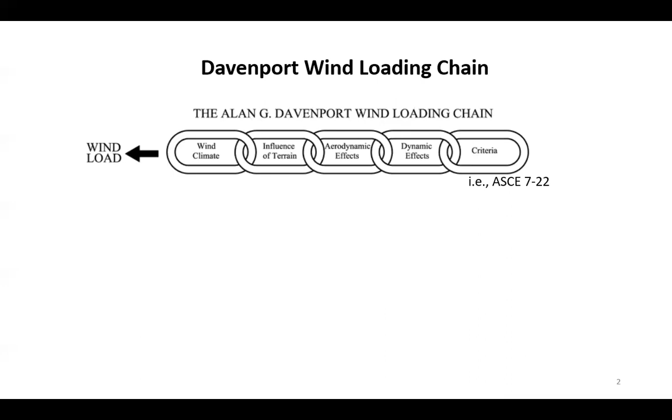The first and second components are marked in red here. V here is the wind velocity, and all the parameters indicate the influence of terrain. The third one is the aerodynamic effects, CP, which is the pressure coefficient. And the parameter representing the dynamic effect is termed G, the gust effect factor.

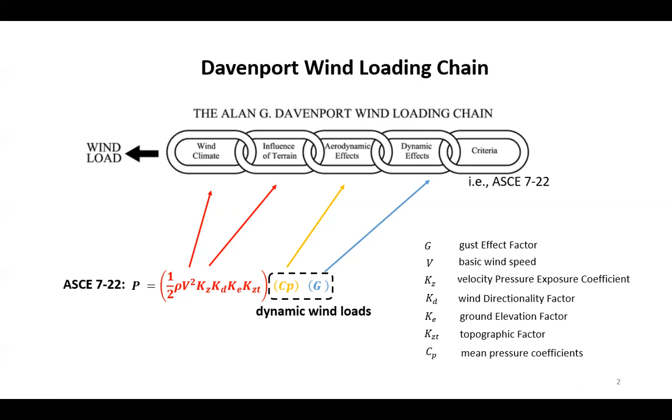That means the combination of CP and G together determine the dynamic wind loads, or the peak wind loads, on structures and buildings. This framework is actually based on quasi-steady theory, which I will discuss in detail in the following sections. In this presentation, I will talk about the pressure coefficient and the gust effect factor, which is very important for the determination of wind loads on structures.

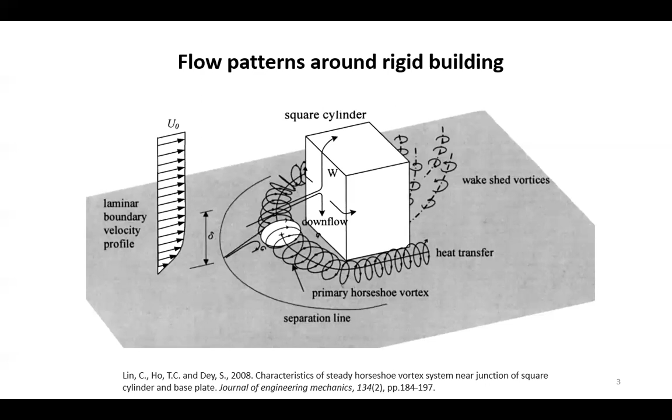In wind engineering, the greatest challenge is determining the fluid mechanism around buildings with different shapes. For example, for a very flat building, such as a low-rise building, the flow will mainly go over the top of the building. While for very slender buildings, such as high-rise buildings, the flow will mainly go around the building. These different fluid mechanics indicate that different parameters of the buildings will influence the fluid mechanism.

For the low-rise or very flat building, the roof height is important. While for a very slender or high-rise building, the breadth B, which is the plane dimension across the wind, is important. The question arises: do aerodynamics depend on non-dimensional geometric parameters, such as the height ratio H/L, plan aspect ratio L/B, or another ratio H/B? Note that L and B are parameters of the plan based on wind direction. L is the plan dimension along the wind direction, and B is the plan dimension across the wind direction.

This is quite different from seismic engineering or similar fields. Wind engineering is heavily influenced by the building shape here.

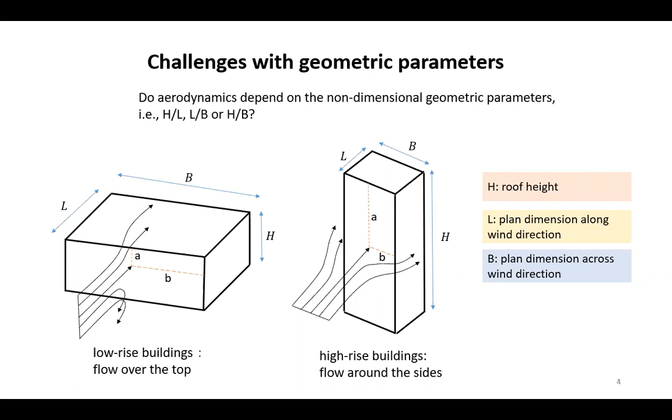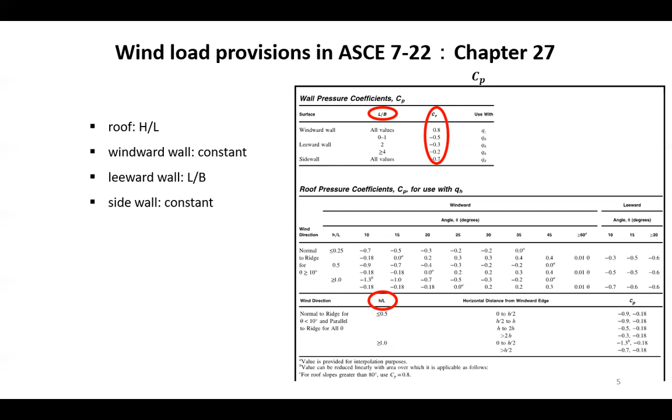In our commonly used load provisions, such as ASCE 7-22, there's a chapter 27 which gives the pressure coefficient based on non-dimensional geometric parameters. For example, for low-rise building uplift, this chapter gives the pressure coefficient as a function of H/L. For wall pressures, like the windward wall (the front wall) and the side wall, chapter 27 only gives a single constant value. But for the leeward wall, the back wall of the building, the pressure coefficient depends on the plan aspect ratio, L/B. But we want to ask: can ASCE 7-22 or the code provisions accurately estimate the wind loads of rigid buildings for any building configuration?

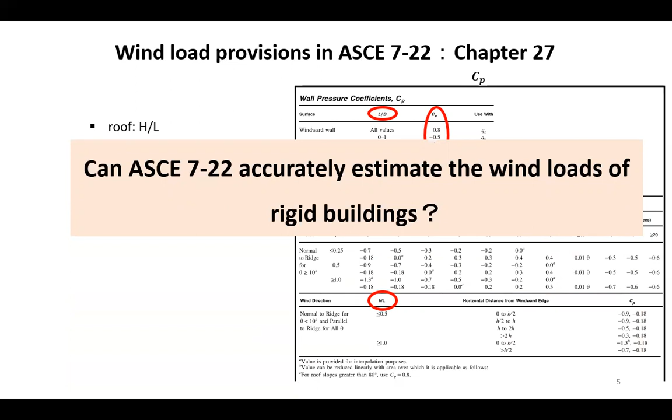As I mentioned in the first slide for the Davenport wind loading chain, the wind loads in many code provisions are developed based on quasi-steady theory. So here I will give a discussion of quasi-steady theory.

Quasi-steady theory assumes that pressure fluctuation is a function of the upstream turbulence, expressed in the equation here. P is the wind pressure, P bar is the mean wind pressure, P prime is the fluctuating wind pressure, and V bar and V prime indicate the mean wind velocity and fluctuating wind velocity respectively. So based on quasi-steady theory, the fluctuation of wind pressure is linearly related to the fluctuation of wind speed. We can use this figure to clearly show the linear relationship between the wind loads and velocity.

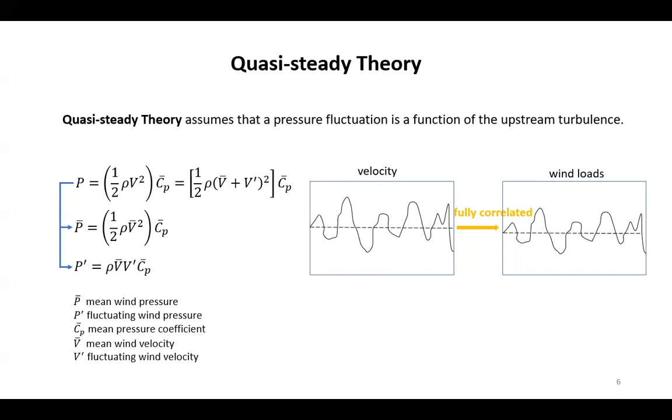Due to this linear relationship between wind loads and velocity in the time domain, we would assume that in the spectrum domain, the wind load spectrum is linearly related to the velocity spectrum. However, we want to ask: does this happen in the real world? No.

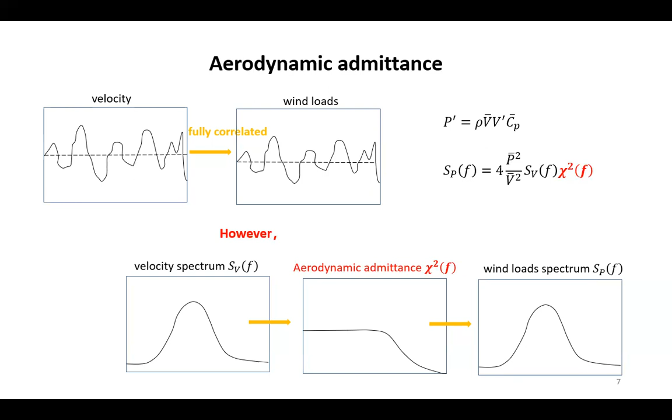Due to the flow distortion around the building or structure, the relationship between the velocity spectrum and wind load spectrum is nonlinear. We give a function named the aerodynamic admittance function to represent this nonlinear relationship between the wind load spectrum and velocity spectrum. Therefore, the spectrum of wind loads is nonlinearly related to the velocity spectrum using this equation.

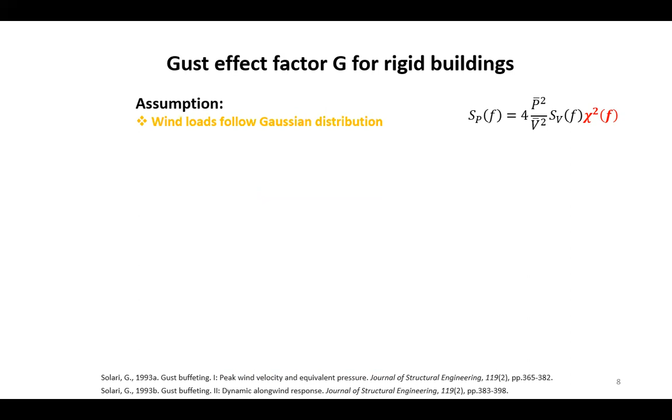Now we develop the Gust effect factor model to account for upstream wind turbulence on dynamic wind loads. This Gust effect factor has two assumptions. The first is that wind loads follow Gaussian distribution, because in a wind field we usually assume the wind flow is Gaussian distributed. The second assumption is that body-generated turbulence is not taken into consideration—only the upstream wind turbulence is accounted for in the Gust effect factor model.

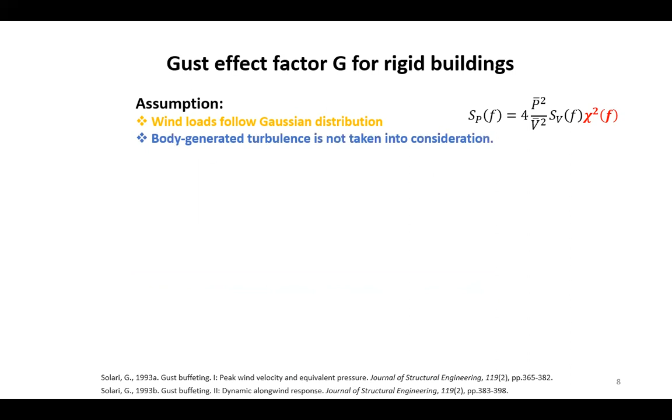Davenport was the first to develop the Gust loading factor to consider the upstream turbulence effect on dynamic wind loads. Later, Professor Solari gave a very beautiful equation for the Gust effect factor model. This model has been widely used in many code provisions such as ASCE, Canadian code NBCC, and European code.

In this equation, two parameters actually influence the accuracy of the Gust effect factor. The first is the peak factor, which reflects whether or not the wind loads follow Gaussian distribution. The second parameter is the aerodynamic admittance function, which relates to the second assumption: whether or not body-generated turbulence affects the dynamic wind loads.

So in order to accurately evaluate the wind loads on structures and buildings, we need to know the aerodynamics of the buildings, like the mean pressure coefficient, very well. In addition, we need to know the Gust effect factor well, meaning we need to know the peak factor and aerodynamic admittance function well.

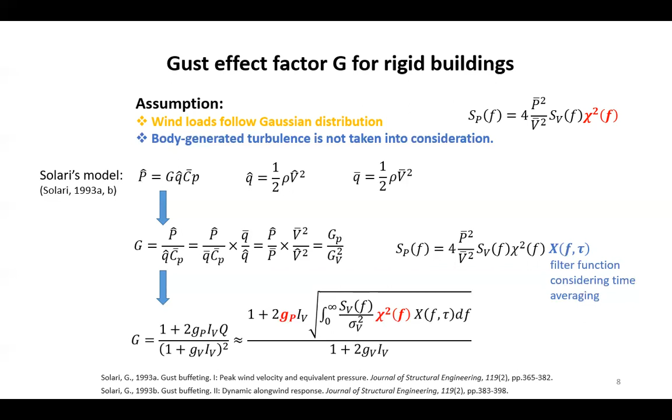In my analysis, I use the original format of the Gust effect factor. In order to evaluate the application of Gust effect factors for any cases, I use this method and compare it with the ASCE model and the constant number.

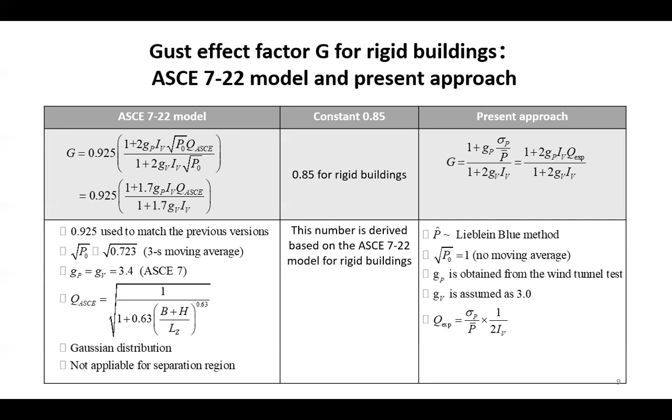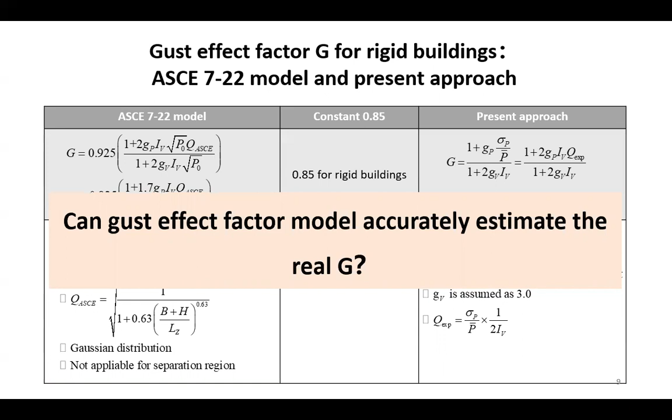So the second objective in this presentation is to evaluate the application of the Gust effect factor model for any building configuration.

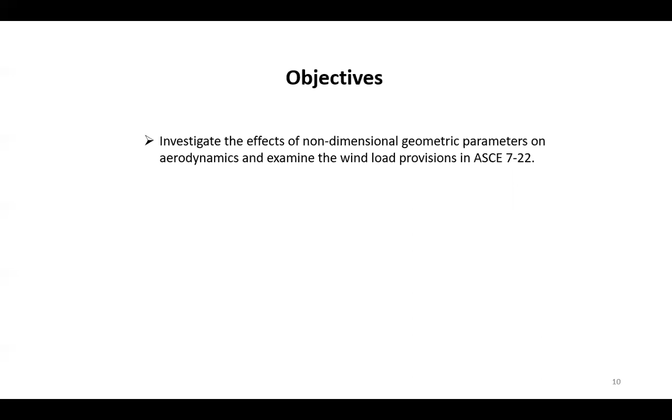I'll give a summary of the objectives in this presentation. I want to complete two objectives. The first is to investigate the effects of non-dimensional geometric parameters on aerodynamic loads, and examine the wind load provisions in ASCE 7-22. The second objective is to study the body-generated turbulence effects on the aerodynamic admittance function and statistical distribution of wind loads, meaning to examine the body-generated turbulence effects on the Gust effect factor.

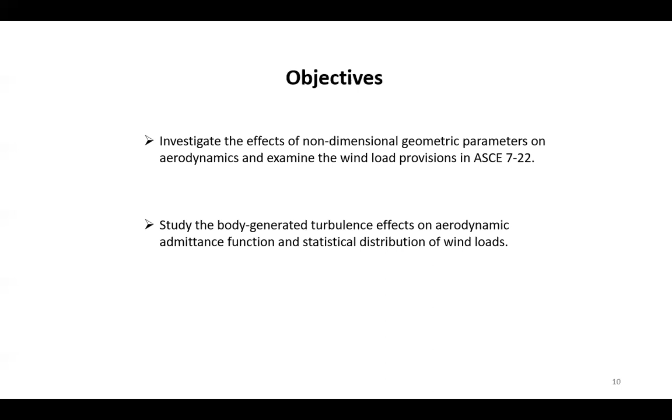Okay, let's look at the aerodynamics. Before I show the results of this analysis, I'll give the terminology used in my analysis. The building shape influences the aerodynamics, influencing the interaction between the structure and the wind field. Therefore, all the dimensions of the building depend on wind direction.

For example, L is the plan dimension along wind direction, and B is the plan dimension across wind direction. But D and W indicate the largest and smallest plan dimension of the building. For case one, where wind comes from this direction, B is the plan dimension across wind direction, so B is W and L is D. For another direction, case two, B is D and L is W. This is quite different, and you should be very clear with this terminology, because all the results I show below are based on it.

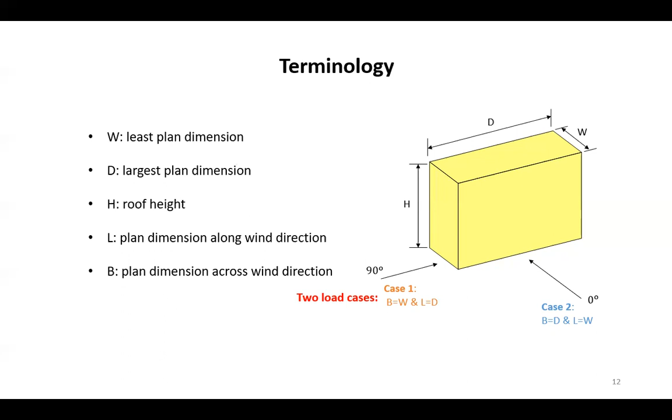In order to systematically study the aerodynamics for any building configurations, we need a very large data set including as many building configurations as possible. The first data set I used is the NIST data set, which includes 36 building configurations, but in my analysis I used 28 configurations with low sloped roofs, meaning the roof slope angle is smaller than 10 degrees. This data set has many building models with different plan dimensions and roof heights.

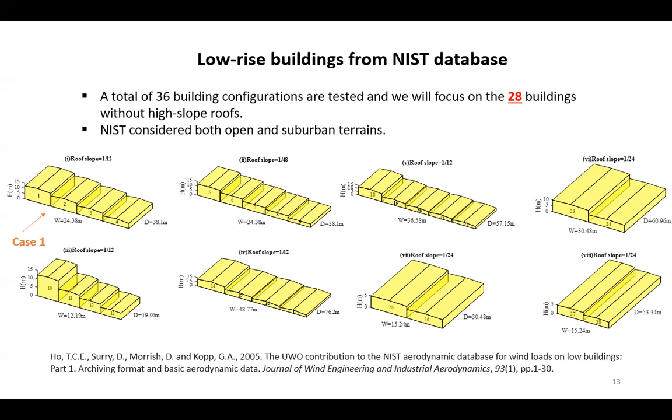But all these data sets are for low-rise buildings. So in order to get more data for other building configurations, I created another data set for mid-rise and high-rise buildings. This data set includes 30 building configurations, classified into 5 groups based on different height ratio H over W, where W is the smallest plan dimension of the building. The height ratios range from 1 to 12.

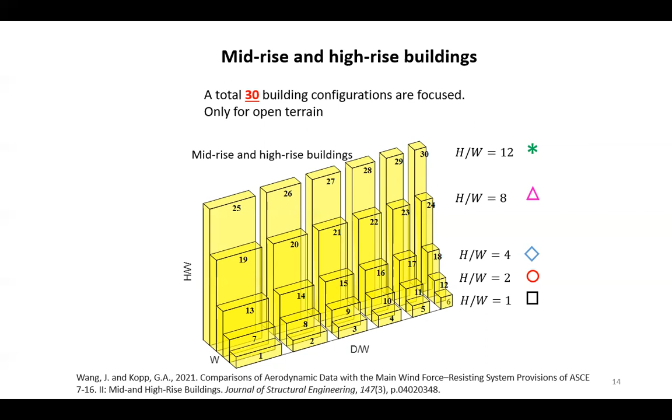In the presentation, I will use different markers to indicate five groups. For the lowest group, the black box indicates the lowest group, while for the highest building, I use the green star to indicate this group.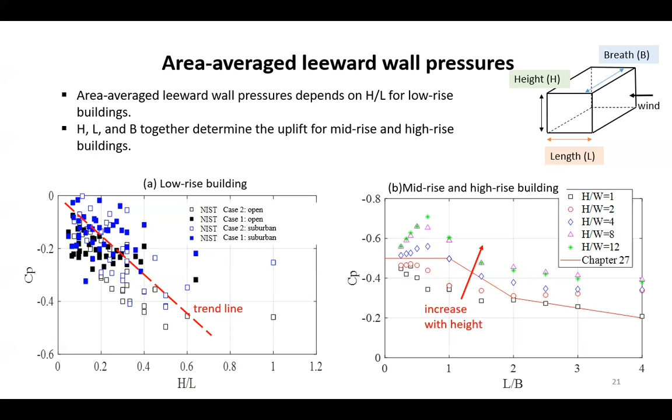For example, the leeward wall over low-rise buildings increases linearly with H over L. For mid-rise and high-rise buildings, all three dimensional parameters H, L, and B together determine the distribution of leeward wall pressure. Also, leeward wall pressure increases with roof height. However, we can conclude that the load provisions in ASCE 7 cannot accurately capture this trend of real or actual wind pressures. So the previous slides mainly focused on the suction or negative pressure over building surfaces - the roof, sidewall, and leeward wall.

Here I will show you the results for the positive pressure on the windward wall, or front wall. I gave the pressure contour plots for four different buildings with different height ratio H over B, where B is the plan dimension or cross wind direction. You can see that for higher buildings with higher height ratio H over B, there is a very strong positive pressure on the windward wall, while for low buildings, the positive pressure is reduced.

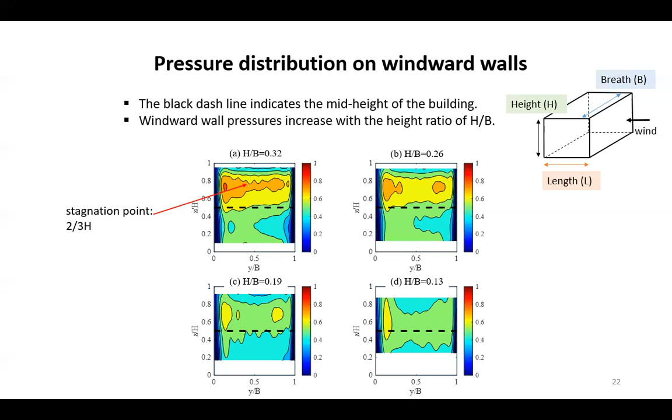So from the contour plots, we can see that the non-dimensional parameter H over B influences the windward wall pressures, which is examined in the figure in this slide. That figure includes all buildings from low-rise to high-rise, and the red dot indicates the ASCE code. The right figure is just for low-rise buildings.

Let's look at all the buildings first in the left figure. ASCE code provisions are conservative, but wrong - unfortunately, especially for low-rise buildings. The low-rise buildings have a clear trend with H over B and keep almost constant for the middle range, H over B greater than 0.4 and smaller than 1. However, ASCE code has a reverse trend with H over B for lower buildings.

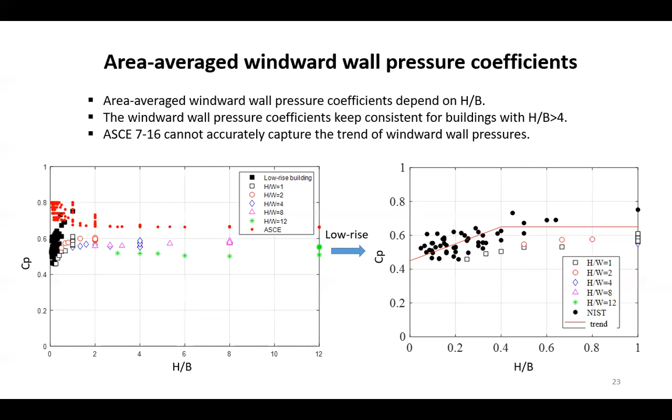For high-rise buildings, very slender buildings, the windward wall pressures almost keep constant and very close to the ASCE code provisions. This figure explains why the windward wall pressures depend on H over B, because of the horseshoe vortices in front of the building. This horseshoe vortex is mainly influenced by the separation point in front of the building, and this separation point is actually influenced by the aspect ratio of the building, H over B.

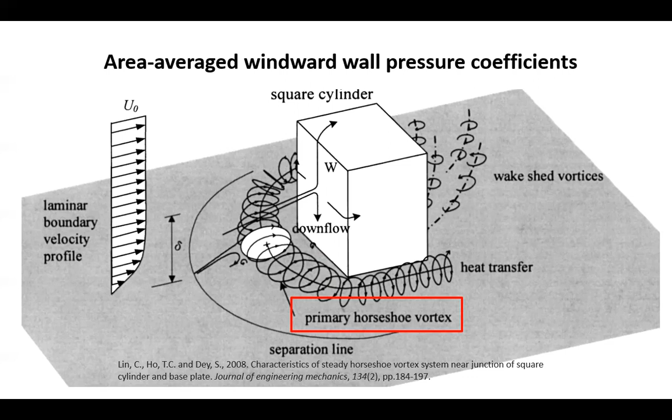So from the fluid mechanism, we know that the non-dimensional geometric parameter influences the pressure distribution over building surfaces. Another key reaction I want to show you is the base shear, or the thrust, for low-rise, mid-rise, and high-rise buildings. For the left figure, we can see that the base shear for low-rise buildings increases with H over B, and this trend is very close to that of windward wall pressures.

For mid-rise and high-rise buildings, the base shear is a function of L over B, and this is close to the trend for the leeward wall. It's because for low-rise buildings, the windward wall is important, while for high-rise buildings, the leeward wall is important. So due to the different mechanisms driving base shear, the key parameters influencing base shear are quite different.

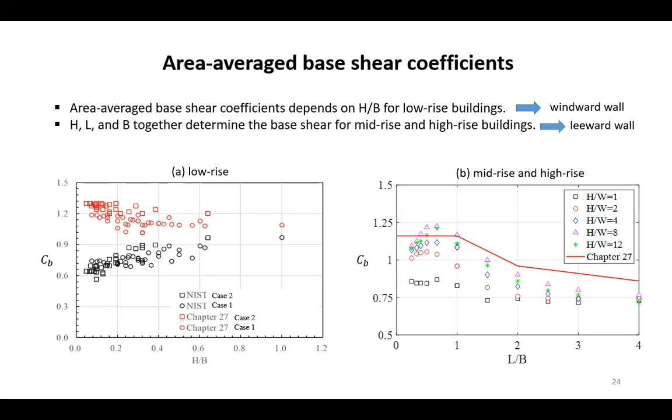From the previous slides, I showed the complex fluid mechanism over buildings, like the separated flow for roof, sidewall, and leeward wall, and horseshoe vortices for the windward wall. All these fluid mechanisms are influenced by different non-dimensional geometric parameters, like H over L, H over B, and L over B. Based on the fluid mechanism, we classify mid-rise and high-rise buildings. This is also a novelty in my research, because to my knowledge this is the first time we gave a clear definition of mid-rise and high-rise buildings.

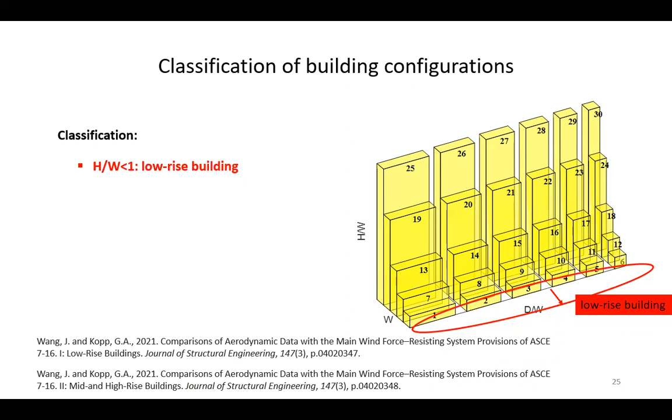Before that, for buildings with height ratio smaller than 1, all the fluid mechanisms are influenced by the roof height, so these buildings are defined as low-rise buildings. For buildings with height ratio greater than 4, the plan dimension aspect ratio L over B is the key parameter, and these buildings are defined as high-rise. The middle buildings, with height ratio between 1 and 4, are defined as mid-rise buildings, and the key parameters for these buildings are actually at a transitional stage - all three parameters H, L, and B together influence the fluid mechanism for the middle range.

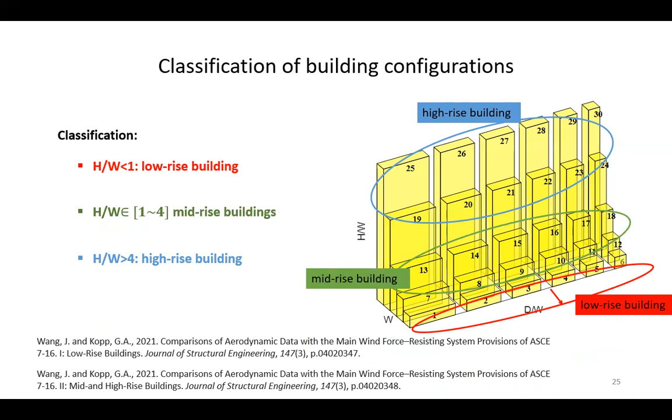And here I want to give conclusions for the aerodynamics, or the interactions between the structures and the wind field. Firstly, for the uplift, sidewall pressure, and leeward wall pressures, we can conclude that H over L works well for low-rise buildings, while for higher buildings, mid-rise and high-rise, all three parameters together determine the pressure distribution.

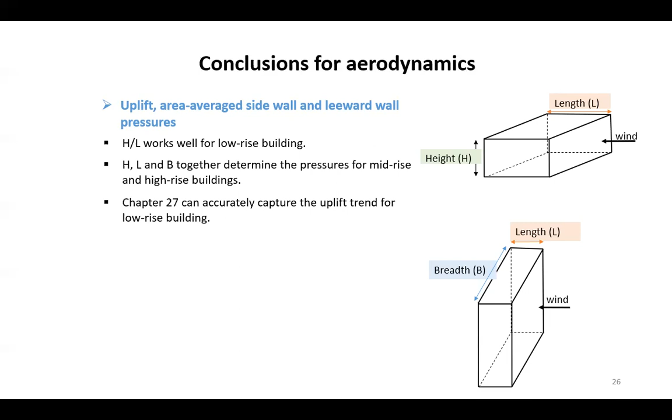Our code provisions in ASCE 7 can accurately capture the uplift trend for low-rise buildings, but this does not hold for mid-rise and high-rise buildings.

And for the positive pressures on windward walls, we find that the non-dimensional parameter H over B works for this tested building. When the windward wall is very tall with a very great aspect ratio of H over B, the windward pressures keep almost constant. And ASCE 7 code cannot accurately capture this.

So from these conclusions, I want to give you a deep understanding of what aerodynamics is, what influences aerodynamics, and what the strengths or shortcomings of the ASCE code are and how to improve this code. And for structural engineering, how to design high-rise buildings more accurately.

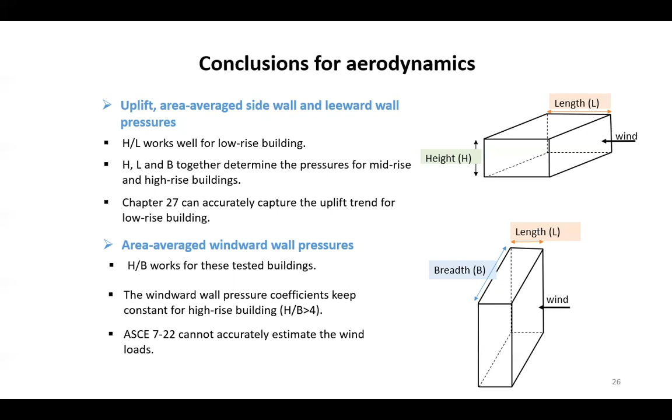The second aspect I want to talk about is the gust effect factor. This is very important. It actually gives a relationship between the turbulence and the fluctuation of wind loads here.

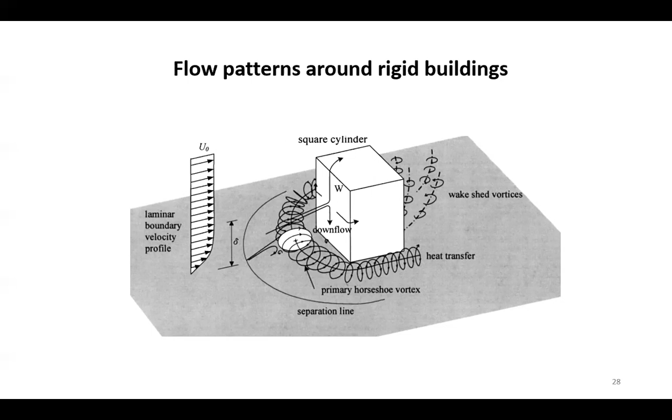Okay, this figure comes again. For the fluid mechanism of this typical building, we already know that the horseshoe vortices in front of the building greatly influence the windward wall pressures on the front wall here. So one may ask, how does this horseshoe vortex influence the gust effect factor?

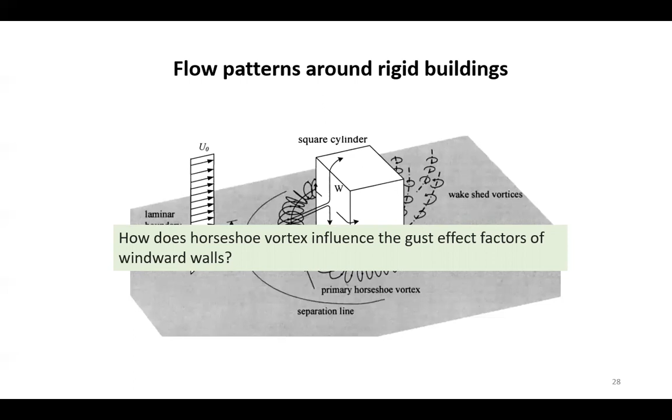Because in the development of gust effect factors, the body-generated turbulence, such as horseshoe vortices, is neglected. So in order to evaluate the gust effect factor, we need to examine the assumptions in the gust effect factor.

There are two assumptions in the gust effect factor, and the first one is the Gaussian tail of wind loads. So firstly, I will examine if the wind loads follow Gaussian distribution by examining the skewness and kurtosis of wind loads. For skewness of 0 and kurtosis of 3, the wind loads follow Gaussian distribution strictly.

From the figures here, we can see that the wind loads on windward walls depend on H over B. For very high buildings with H over B greater than 4, the skewness and kurtosis tend to 0 and 3 respectively, indicating this building follows Gaussian distribution more closely.

However, for very low buildings, low-rise buildings here, both the skewness and kurtosis exceed 0 and 3. So these buildings follow non-Gaussian distribution. This finding conflicts with the assumption in the gust effect factor, indicating the application of the gust effect factor deserves further investigation.

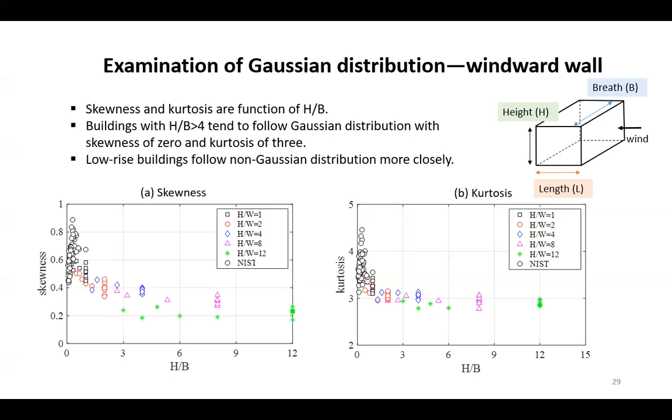And the second assumption in the gust effect factor is the ignorance of body-generated turbulence. So I want to examine how body-generated turbulence influences the gust effect factor here, from the spectral domain.

The left figure is the spectrum, or the energy content of wind pressures, while the right figure here is the aerodynamic admittance function. This relates the fluctuation of wind loads to wind turbulence.

And this is actually influenced by the horseshoe vortex, the body-generated turbulence. So we can conclude that the body-generated turbulence is very important for the aerodynamic admittance function, for the spectrum of the wind loads. And the assumption in the gust effect factor, by ignoring the body-generated turbulence, is wrong.

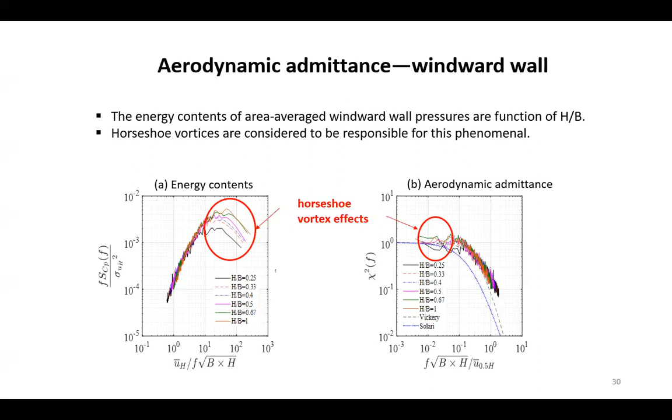For very high buildings in this figure, H over B greater than 4, the measured gust effect factor approaches the Solari model. Well, for lower buildings, the gust effect factor model will underestimate the measured gust effect factor.

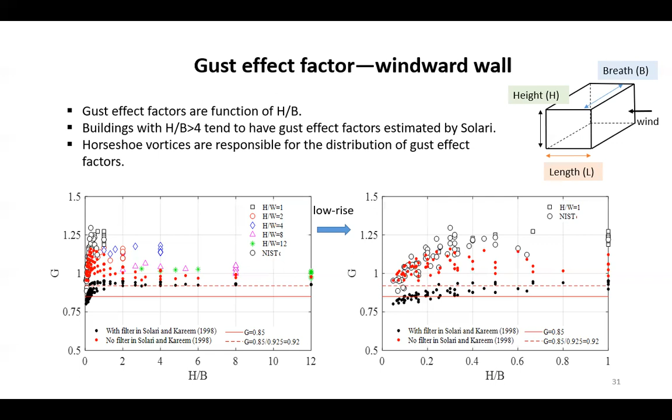And this is another finding in my analysis. It's very interesting that we conclude for lower buildings, the horseshoe vortex is very important, while this effect is minimum for high-rise buildings with height ratio H over B greater than 4. The middle buildings are actually at the transit stage.

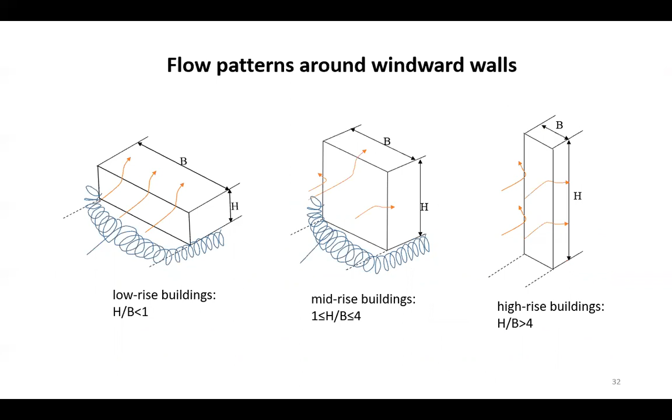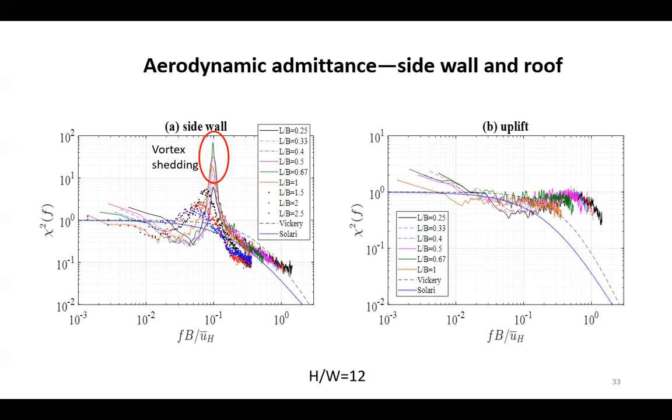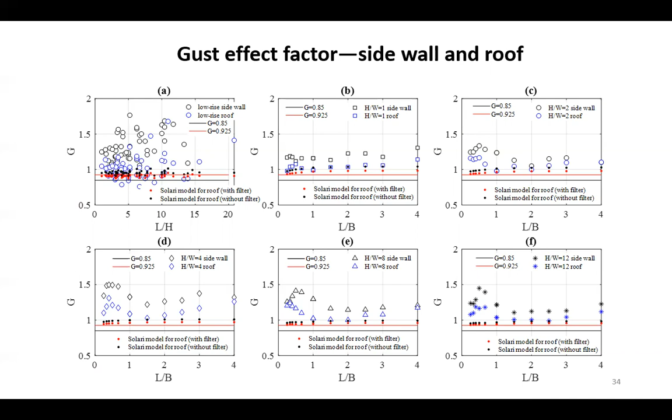And this gives the results for the Gust effect factors of sidewalls and roofs compared with the model. The conclusion is the same as with the windward walls. We can conclude that the model, by ignoring the body generated turbulence, will underestimate the real Gust effect factors. And the conclusions for that effect factor are here.

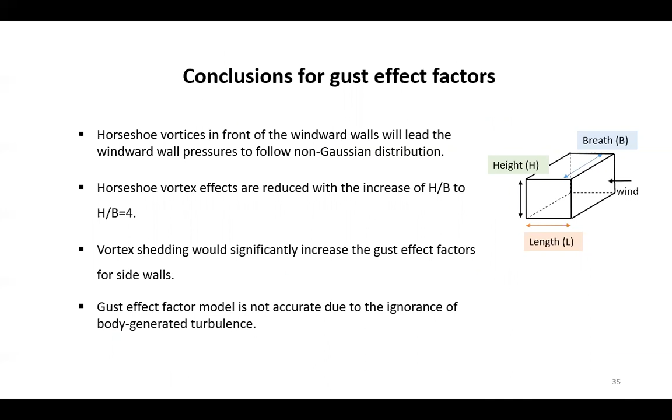So, I want you to know how to evaluate the peak wind loads by using Gust effect factors through this presentation. Okay, the previous slides are the analysis of the study from my past, in my postdoc, and now I want to talk some about the tornado, which is the topic in my current stage.

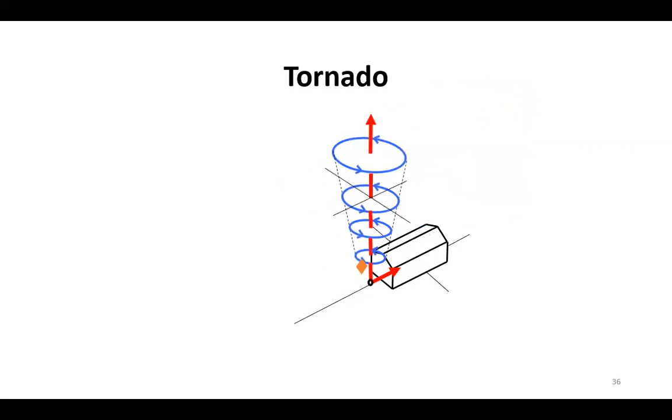Tornado, what is tornado? Tornado is a small-scale, three-dimensional wind event. It's quite different from the boundary layer wind. So the building model size relative to the tornado size is very important. In addition, the tornado wind field is quite complex.

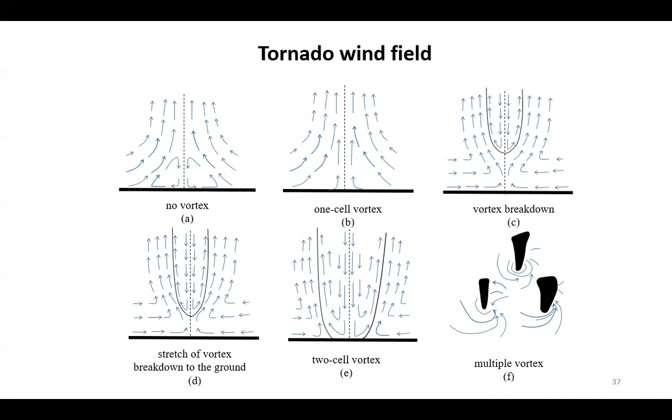There are many different aspects. We want to give some time for questions, so I suggest we can have another lecture for tornadoes. Okay, yeah, it's very simple. This is the last slide.

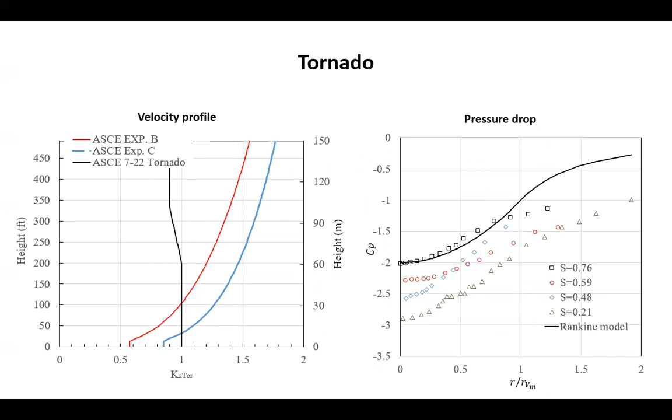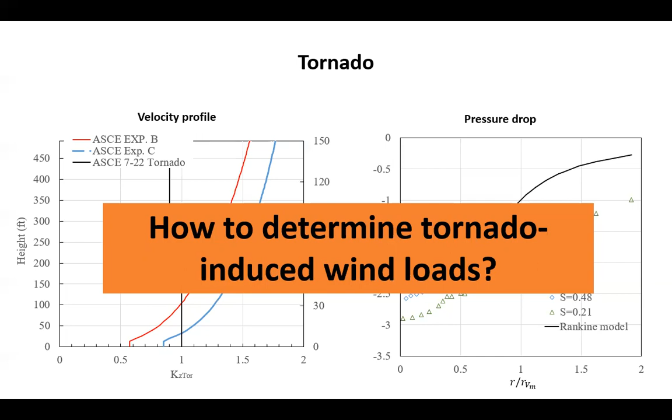Okay, so I want to say that for tornadoes, there are many different aspects compared with boundary layer winds, such as the velocity profile and the pressure drop associated with tornado. So we want to know how to determine tornado-induced wind loads. Can we use the framework developed by the Davenport wind loading chain to evaluate tornado wind loads? This is unknown. There's a research gap in this area, and this is what I want to do.

In my near research study, I want to use the WindEEE Dome here in Western to investigate the tornado effects on structures. Yeah, this is my current topic in my early career as assistant professor, and I welcome any students interested in this topic. Okay, thank you.

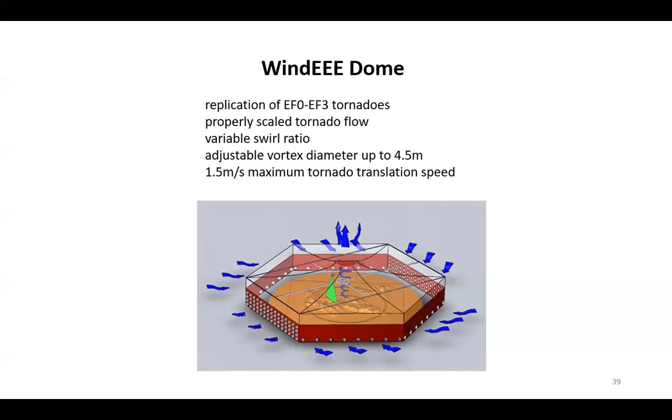Two things related to what Jen has presented. One of the papers she presented, its results won the best paper award in the ASCE Journal of Structural Engineering. And the second thing is her work is now in the process of being implemented in the ASCE 7 code. So those are very good things, and that shows the impact of the research. That's very important, the impact of the research. In addition to publishing papers, we always look to the impact of the work.